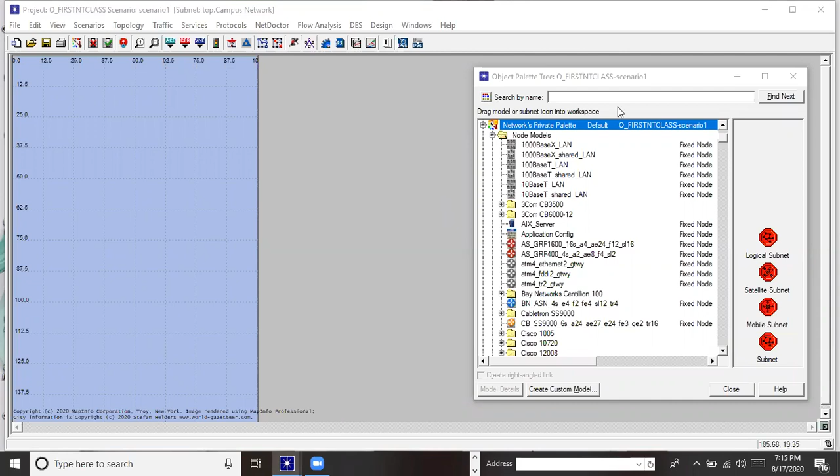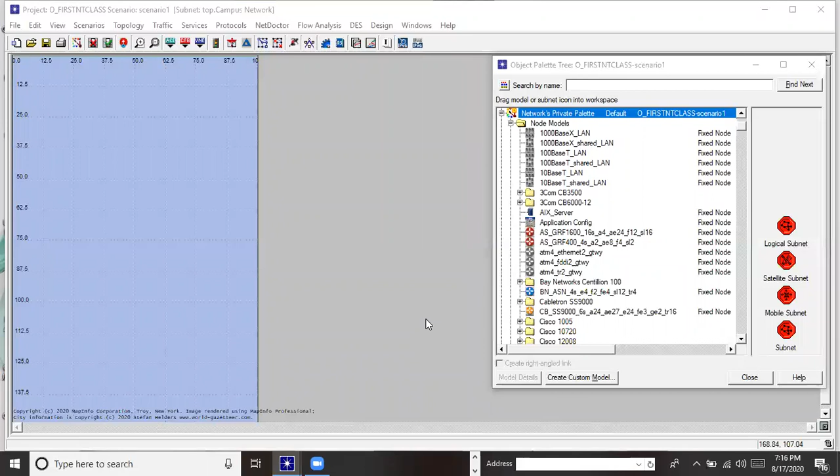Sometimes the speed also matters, there are a lot of things to consider, including the speed. But again, to avoid the looping, you have to make OPNET run as an admin. You have to configure it like that, not like the way I was just clicking, then going to the admin. You permanently do it like that, and that looping will go.

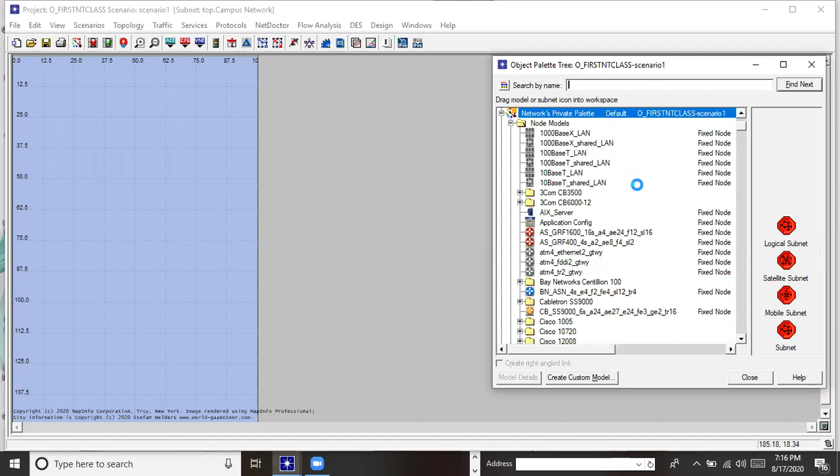All right, okay, so we continue. We have this palette now. What I like doing is where you see search by name, just before that there are those dots. Just click there, I want to expand these technologies so that we can see LANs, switches, routers, firewalls, devices, printers. So we are going to be using these tools to design a network.

Where did you click on find next? Have you seen where it says search by name? Oh okay, I found it. Yes, okay, just click there.

Right, so now we'll start designing a network. We are going to design together a network. We are going to design a cyber university campus. Are we together?

Okay, so you get a subnet. I'm going to get a subnet. We have 3 subnets: subnet mobile, and subnet satellite. We'll just get a subnet.

So how do you get the subnet? You just click on the subnet and drag it to the left-hand side. That's the work area, that's where we'll be designing our network from. You just drop it anywhere. As you can see, I've dropped it.

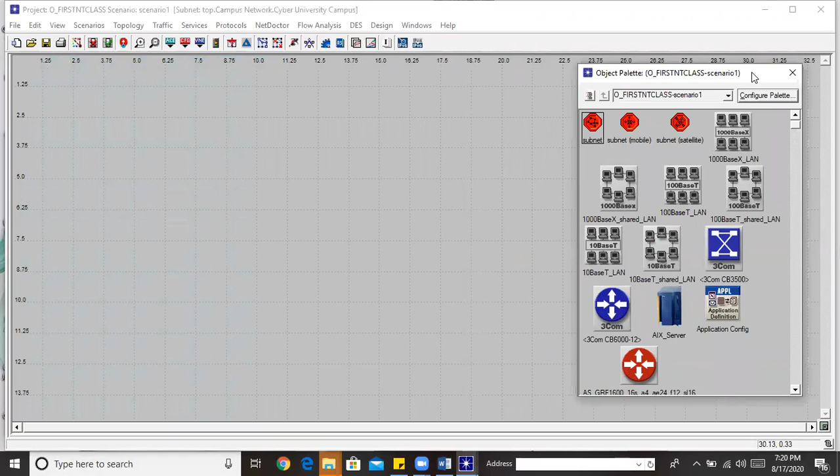So there now we'll start designing. We'll start designing. So I'm going to choose 3 departments. We are going to have administration.

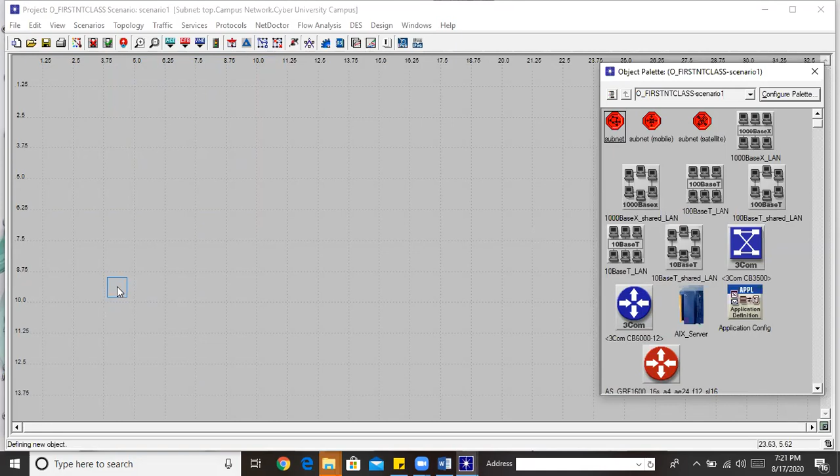We are going to have ICT support, or IT support. Then we are going to have, okay, we will put schools. Let's have School of Medicine. Or let's just put one school. We'll do it like this: I'll put this subnet, another subnet, and another subnet.

So the first one, let me say School of Computing. School of Computing. Then we are going to have admin, we're going to have admin. And we are going to have admin. Then we are going to have IT.

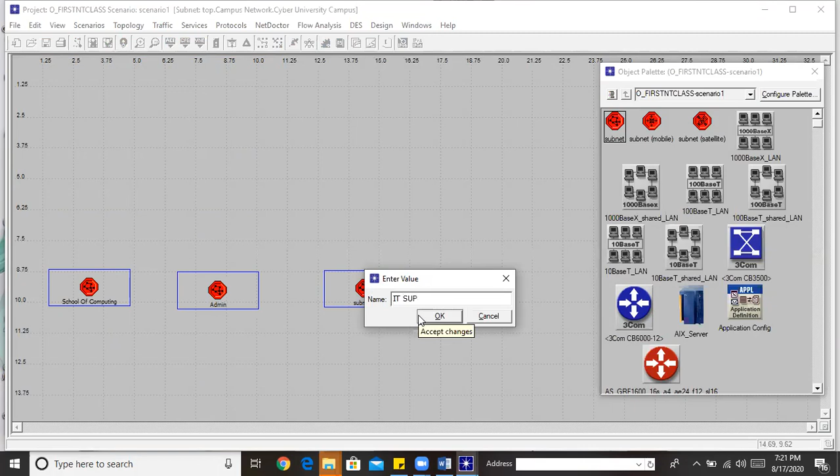IT support, we're going to have IT support like that. We're going to have IT support. Then we'll start now. We'll enter into the School of Computing department.

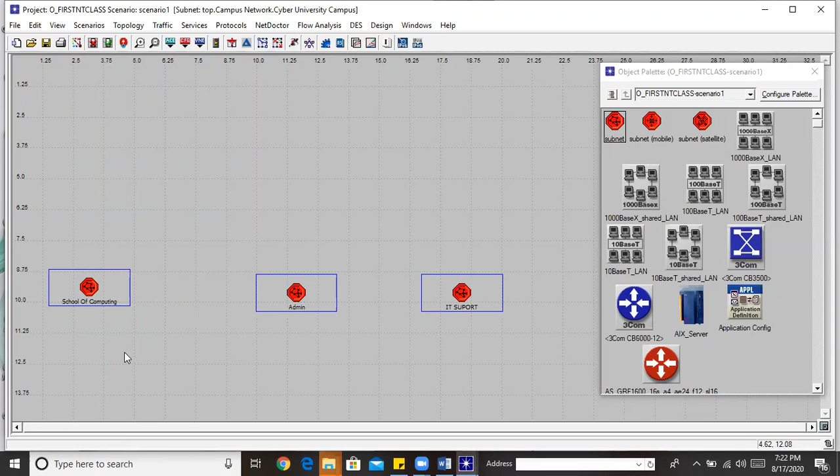Just double click there. Then I'm going to look for, when you are designing a network, what do you need? What devices do you need? A router, okay, so let's look for a router.

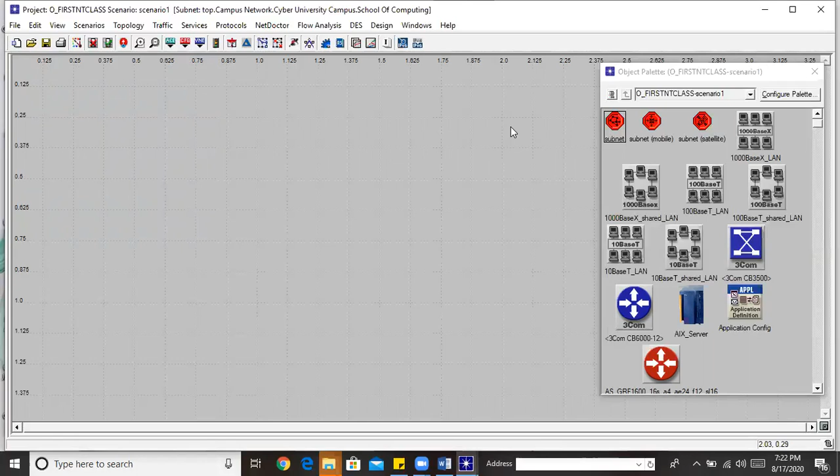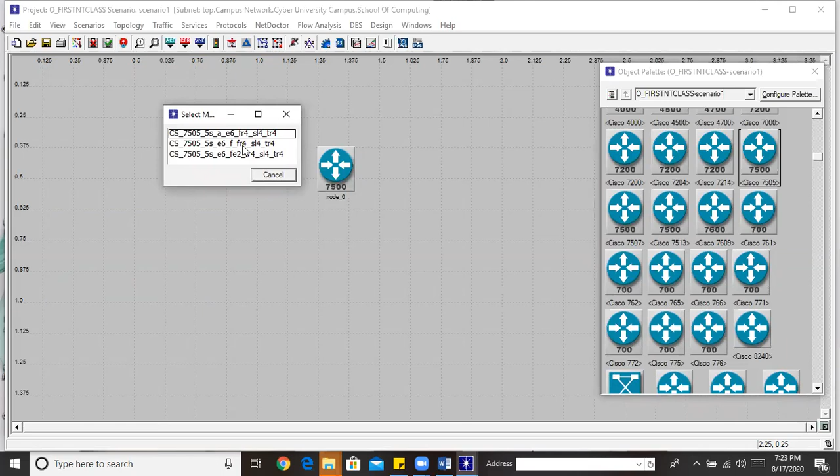Let's look for a router. I'm familiar with, I like using, let me check. 7500, I'm familiar with this one. So I'll pick a 7500 router. Then I'll get the version, the first version.

Okay, then what else do we need? What else do we need? We need the fly leads. Sorry, network cables. Okay, before network cable, yeah, we need network cables. What else?

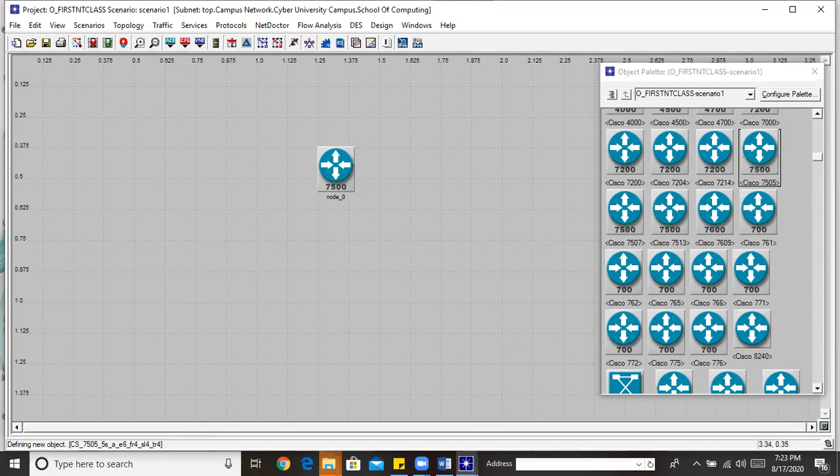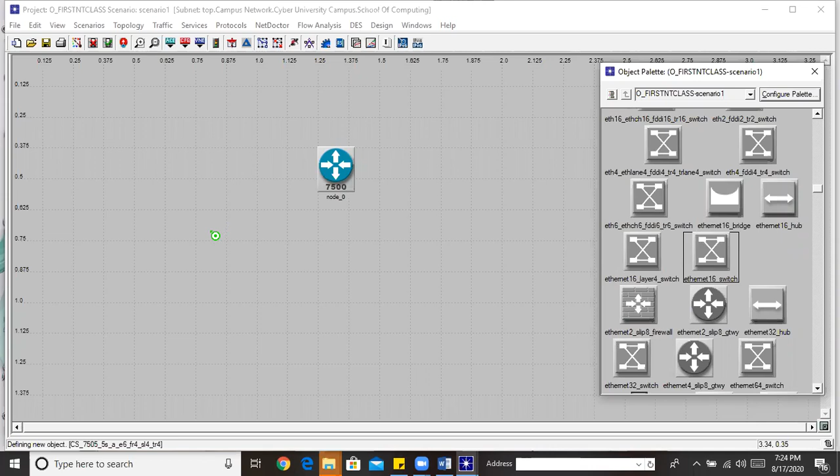What else? A switch. You need a switch. Depending on the number of users you need, that will determine the port number of the switch. Let's look for an 8 port switch. Actually, 8 port or 16 port switch? I'll get a 16 port switch.

Then I'll get the stations. Just get what we call now, we are getting 100 base T LAN. Instead of putting computers, I'll show you the advantage of a switched LAN.

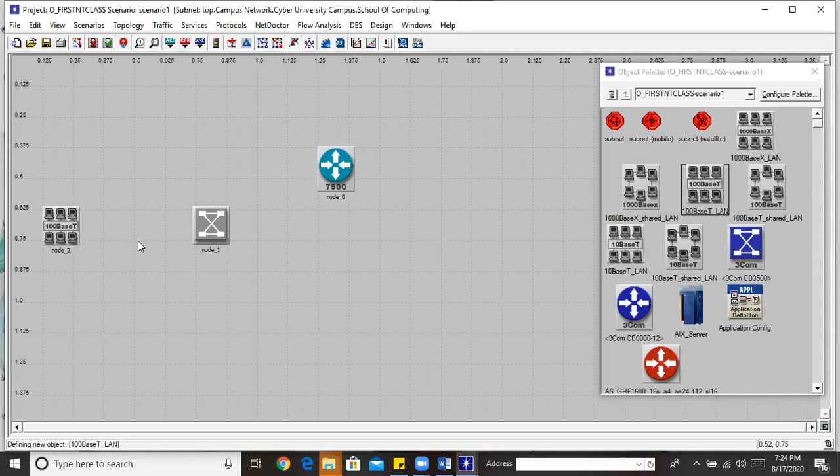That's a switched LAN. The way you see computers like that, meaning there's a switch in between. Then we should also add a printer, add the services, we should add a printer.

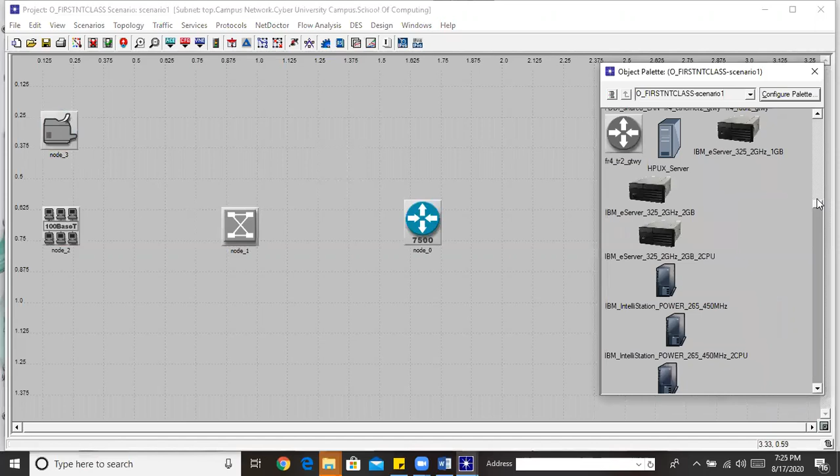All right, so we have to rename these devices. Before that, you talked about network cables. Where do you find network cables? Those are the cables. Since we have a 100 base T switched LAN, we should have 100 base T cable. Look at this, 100 base T. So I've picked a cable. You just click on the cable, meaning you have picked it.

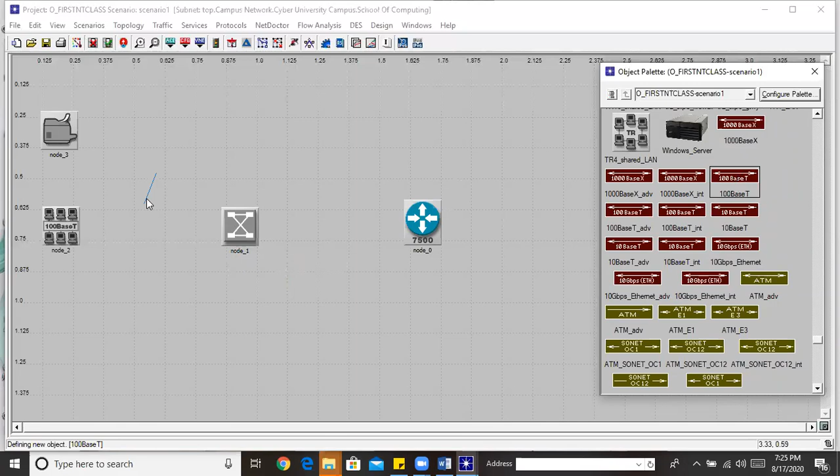Then let's start connecting. I'll connect a switch to the router. Okay, a switch to the router. I'll connect 100 base T LAN to the switch. Then I'll connect a printer to the computers, to the users. These are the users, okay?

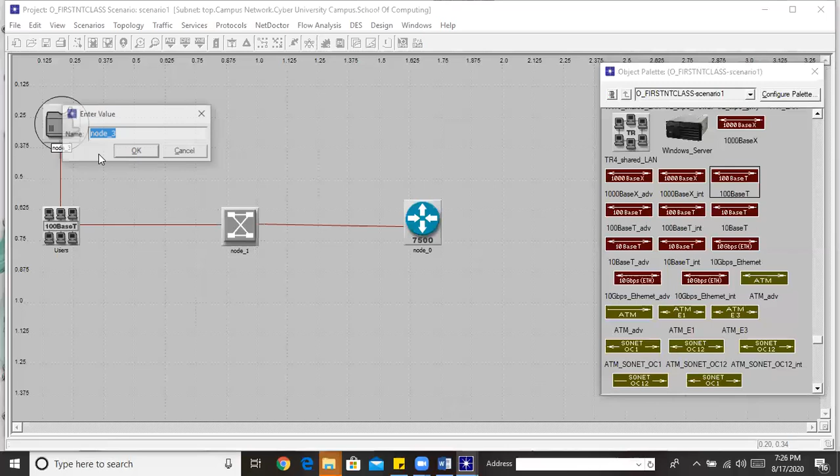So let's rename these. I'm going to set the name, then I say users. Then rename this as a printer. Then this is a School of Computing switch. Just say School of Computing switch.

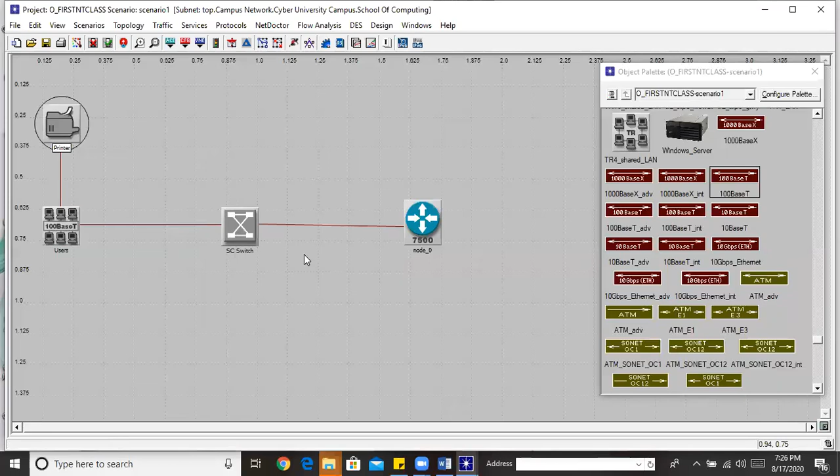Sorry, Mr. Brian. Yes. Is it supposed to be a network printer? It's up to you, you can put it as a network printer or a local printer. But since we only have those users, we don't have other users. Let's say if in School of Computing we have... let me do this, let me do this.

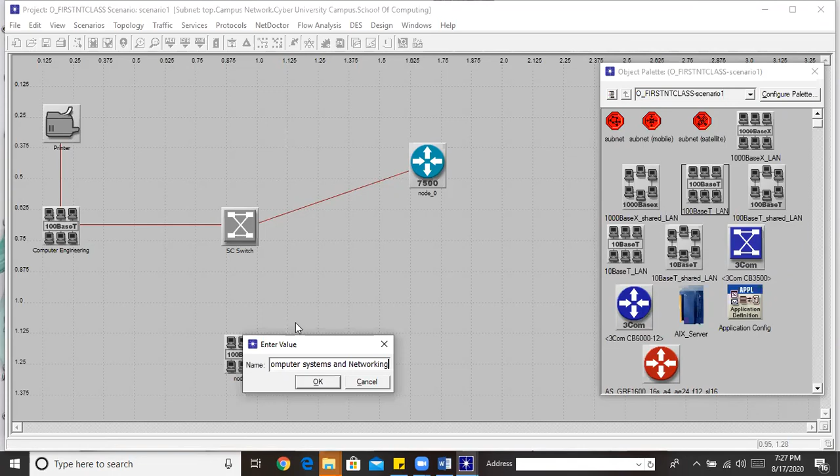We can have another bunch of users on this side, right? So this time, let me say these are studying computer engineering, then these ones are studying computer systems and networking, right? So now we can argue and say we should have a network printer.

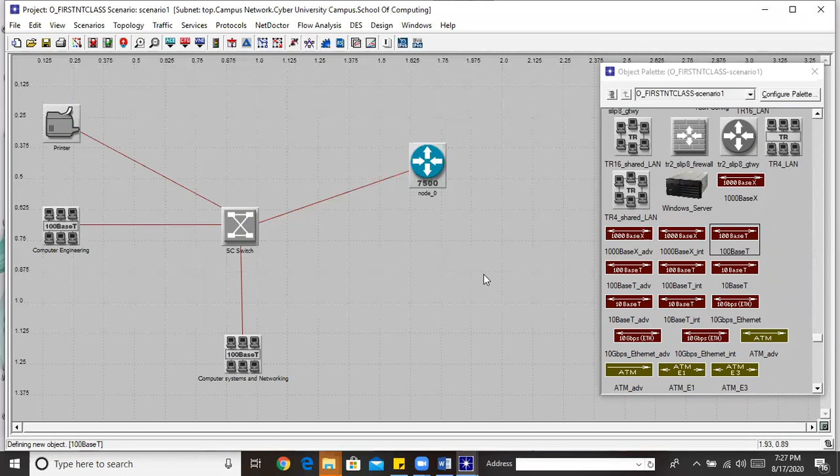A network printer where you connect one to the switch and the other to the switch. Are we clear? Are we clear? Okay, yes, wait together, okay.

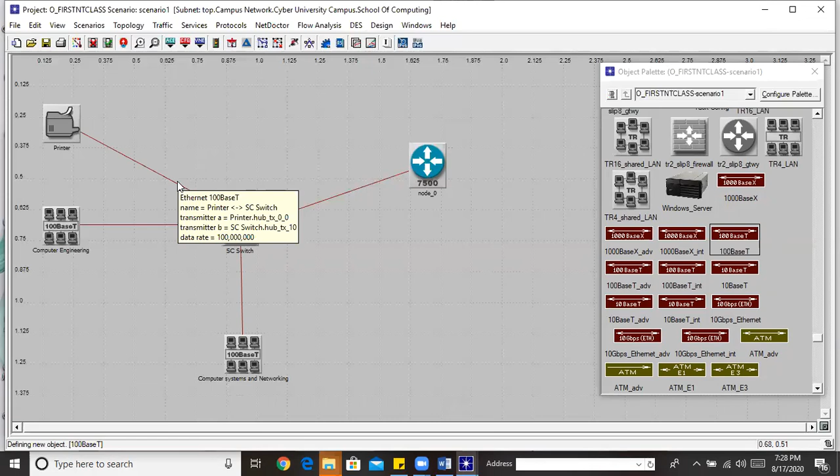This is just an example we are doing, but we have to know all the ideas of designing. Let's say if the network is bigger, you can say we are just going to have one network printer. But even here, you can still argue if you want. Remember, the design is yours, you are the network engineer, you want, you know the best.

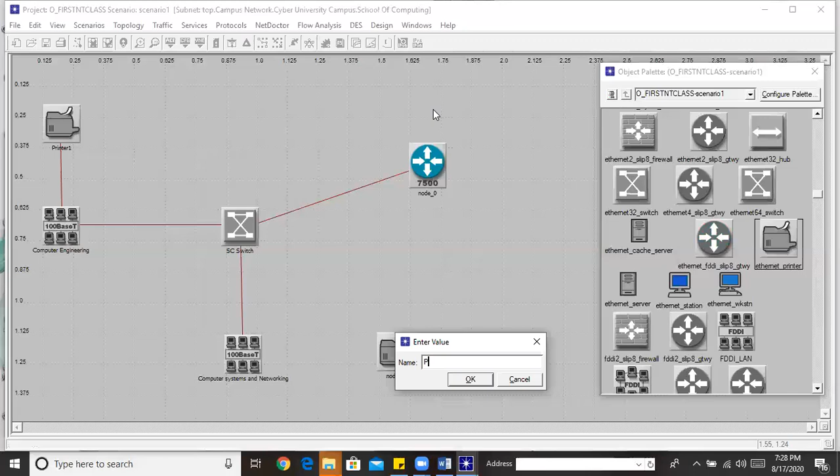So if you want, you can say okay, we have this printer, we can have this printer. Then you decide yourself, you are going to say let me have another printer. This printer will be, I can say now, printer 1. Then we are having a printer 2, connected there.

Have you seen that it is also making sense? It is, isn't it? Okay, so we have designed that network. We have designed, remember we haven't configured yet, we have just designed.

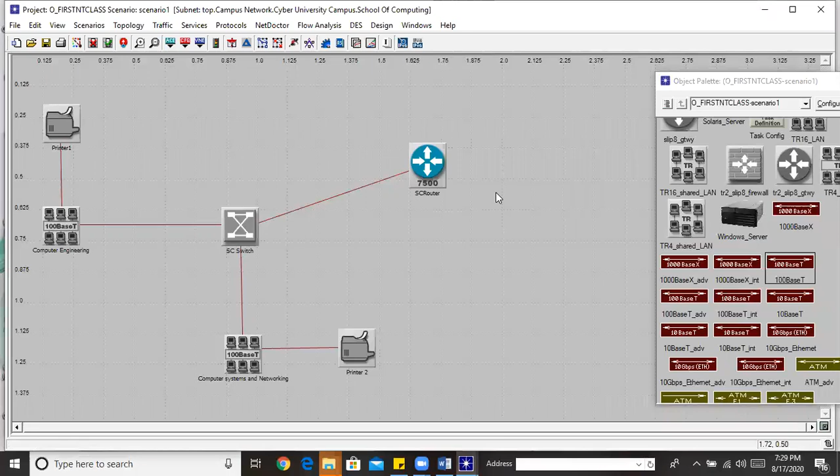So this router, you have to rename it as well. You have to rename it as School of Computing router, it's a router in the School of Computing. There will be so many routers, so it's important that you rename those routers, you give them names.

So how do you get out of this subnet? You can right click. Before we move away from this screen, how did you arrive at this switch? How did I arrive at the switch? Where I got the switch from? What has made you choose this particular one?

Let's say what makes you go for a particular switch. First of all, it's the number of users that you have. Let's say if I've got 10 users, I'll go for a 16-port switch, that is the one closest to it. So I'm going to have 10 users connected to the switch, and I'm going to have 5 more ports remaining, for future use, because tomorrow I can decide to have another computer connected to the switch, isn't it? Yes. So that switch you see, we picked a 16-port switch.

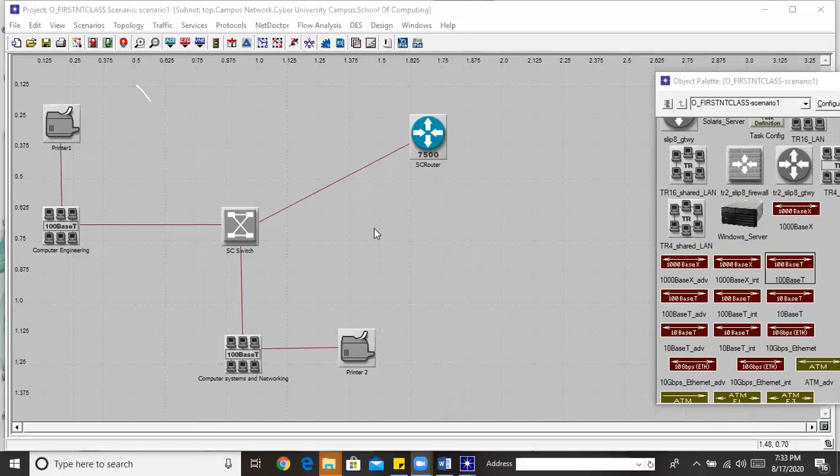You just click on 'go to parent subnet' and we are back outside that particular subnet. If you want to go back, double click School of Computing again. Look at the icons above, do you see the cursor? Where the cursor is, when you click there, it will take you to the parent subnet.

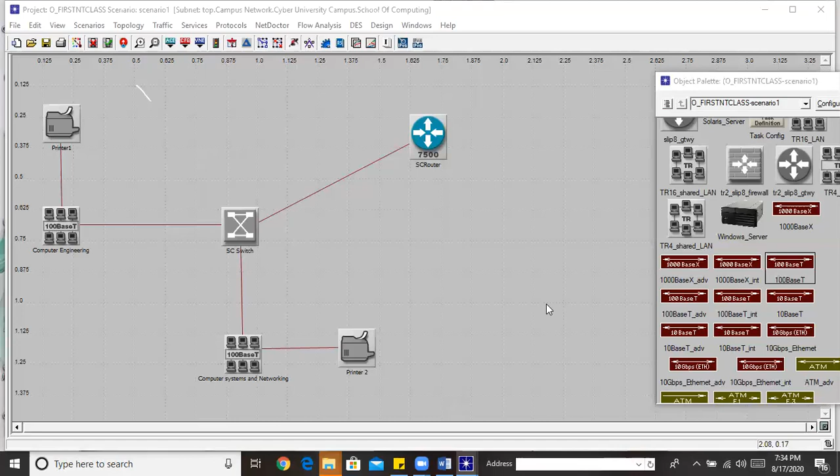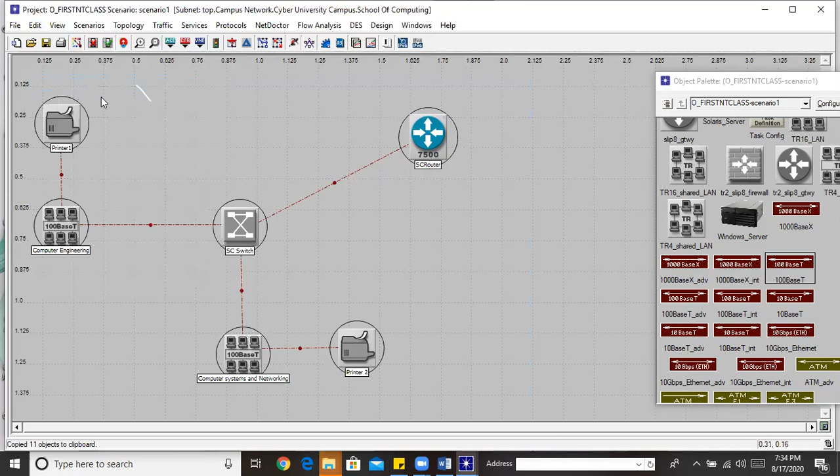To avoid the hassle of having to design it again, just copy what we have designed, copy all the components, then go to edit. Select them, go to edit, copy, then go to the parent subnet, go to admin, edit, paste. Then this topology we have again. Are we together?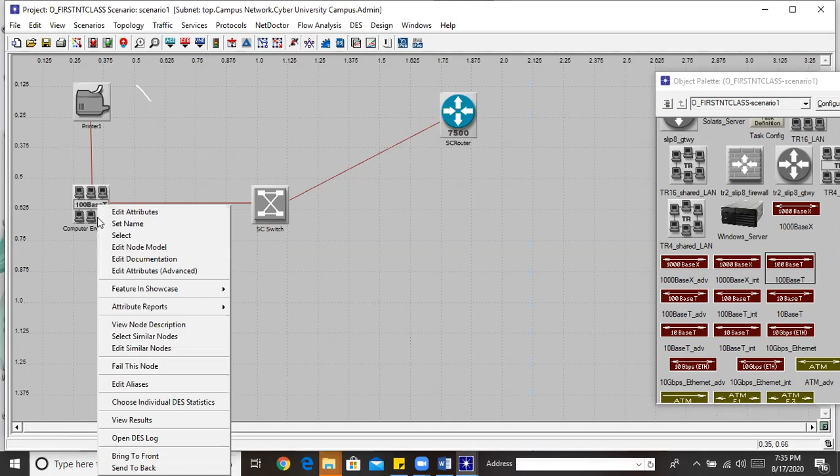Yes, so we are in admin now. In admin, we don't need this also. We're just going to have admin users, that's it.

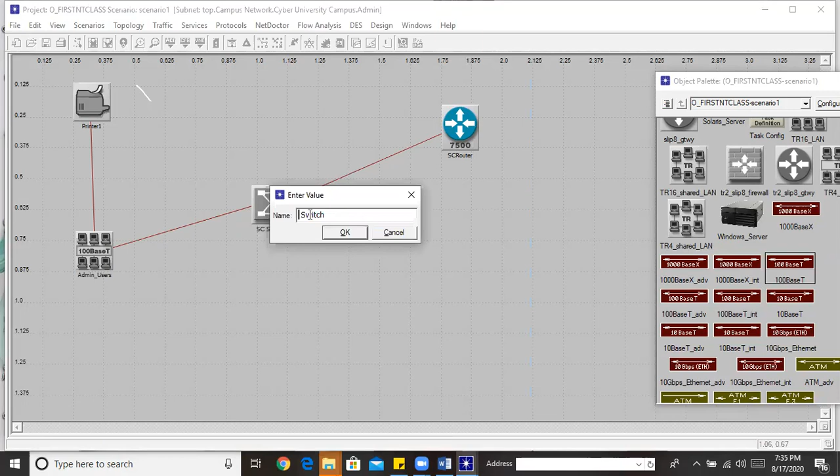Then you have to rename this switch. It's now admin switch.

Wait a minute, I think I remained behind. I remained behind, how did you delete the other? Oh, you just click on it, then hit the delete button on the keyboard.

I'm okay, yes. Have you managed to delete? Yes. Okay, right, then that's done.

Go to subnet, then do the same in the School of Computing again. So in School of Computing, we have users, those doing information systems, and those doing networking.

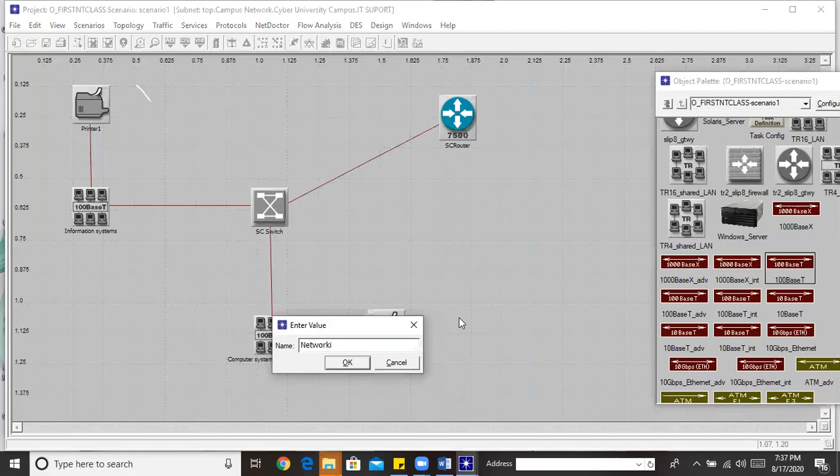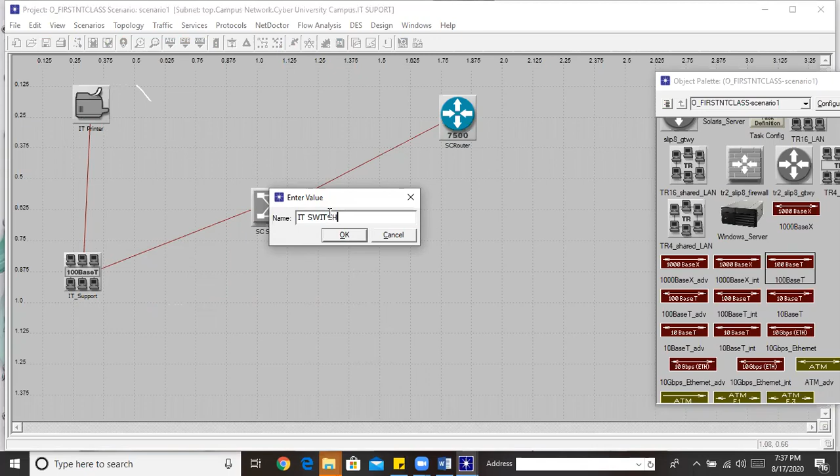Oh, this is IT support, by the way, so we don't need this also. We just need IT support. I'll leave it as IT printer. Then this is the IT switch, IT router. Okay, IT router.

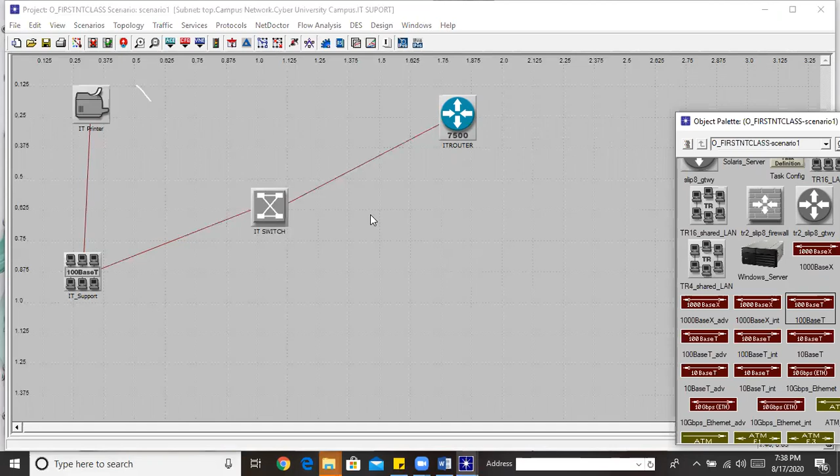Are we together? Yes. So I'll go to the outside of this subnet.

Just a quick question: apart from the simulator, are we also going to get to use actual routers? I'm sure by next semester we'll be using also packet tracer. Okay, okay.

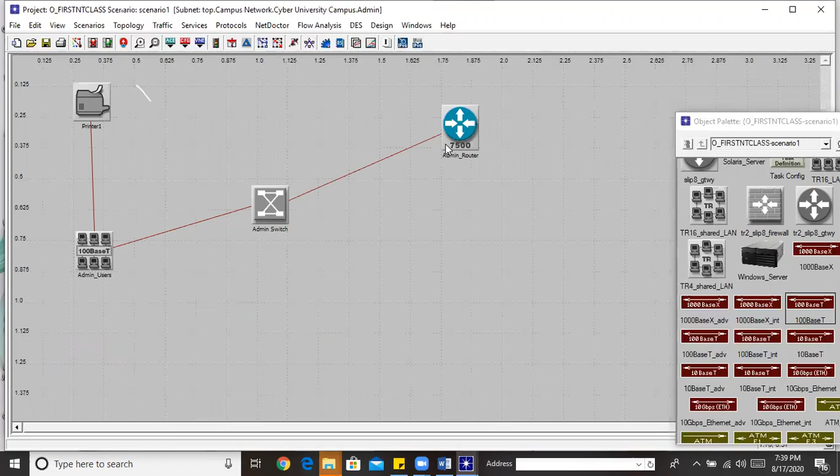Then okay, so now design the network, design this. I'm sleeping. Okay, go and sleep.

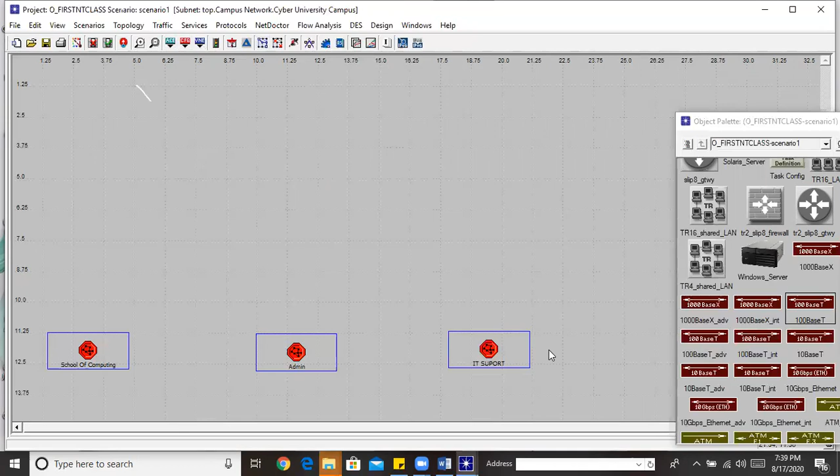So now we need to link these routers, isn't it? I mean, we need to link these subnets because they fall under Cyber University Campus, so these subnets need to be connected together. Isn't it? Yes, okay.

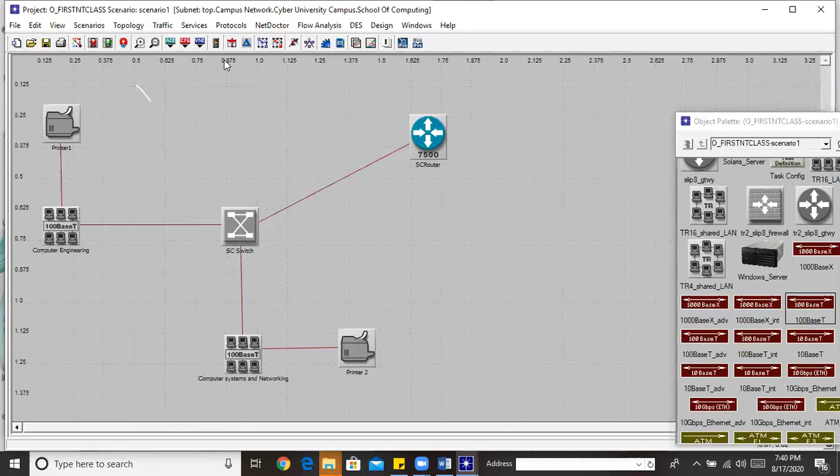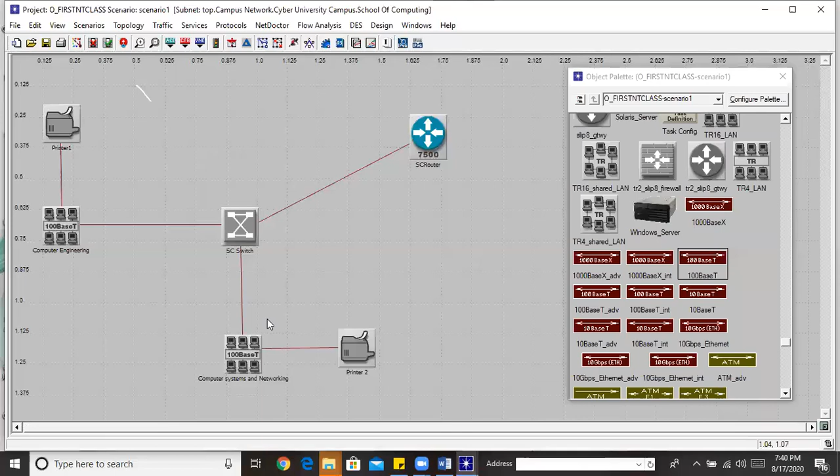So we need a backbone link, a faster link than what's inside the local area network, because in the LAN we have Cat6e, and we can't use Cat6e as a backbone, isn't it? Yes. So we'll put a switch, a core switch. I'm sure you've heard of a core switch, or if you haven't, you are going to hear about one. We are going to put a core switch.

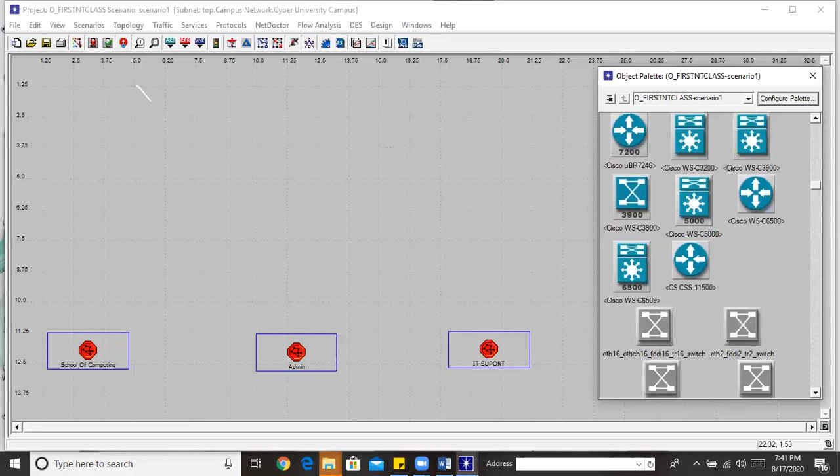I'll still look for a 16-port switch. I'm renaming this.

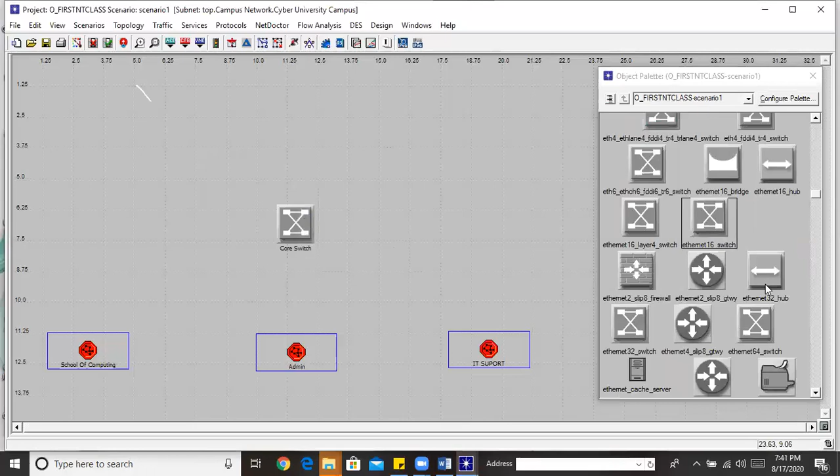This is a core switch. We're still using 100 BaseT here. It will connect there, and it will pop up the node where this switch will connect.

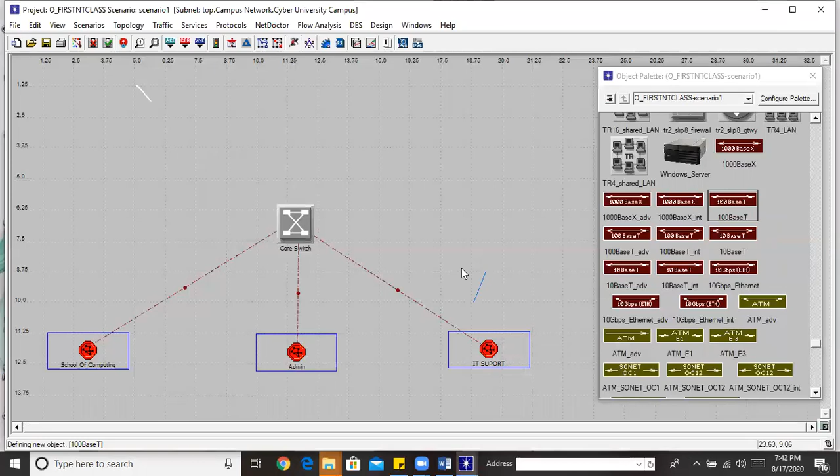This switch is connecting to a router. Click OK. Even this one is connected to a router. Then this one will also connect to a router.

What cable are you using to connect them? 100 BaseT, I'm using 100 BaseT. When you click there, it's Ethernet 100 BaseT. So is BaseT like a Cat6? Yes, Cat6.

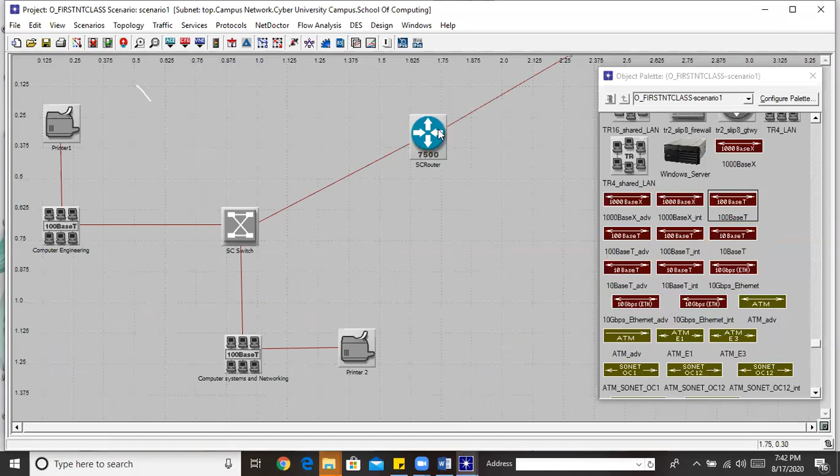When you go to School of Computing, you can see the router. It's on the grid now. Are you seeing it there? Even this one is connected.

So we'll need to log in to enable the ports and everything into the switch? No, that one is already done automatically. Let's see if we can go and do it manually. But there's the automatic one and the manual one.

Okay, so now remember we had this. This is now the main subnet. When you enter there, that's where we have this.

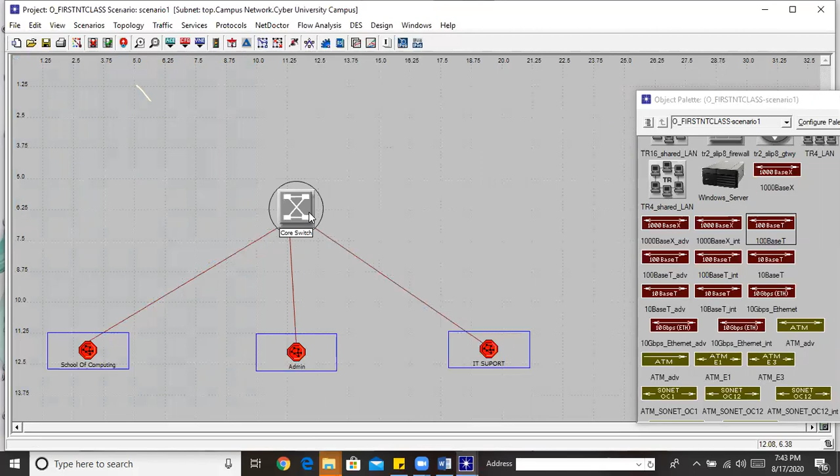So here now we are going to put again a core router, because this switch can't generate traffic. So let's look for a router.

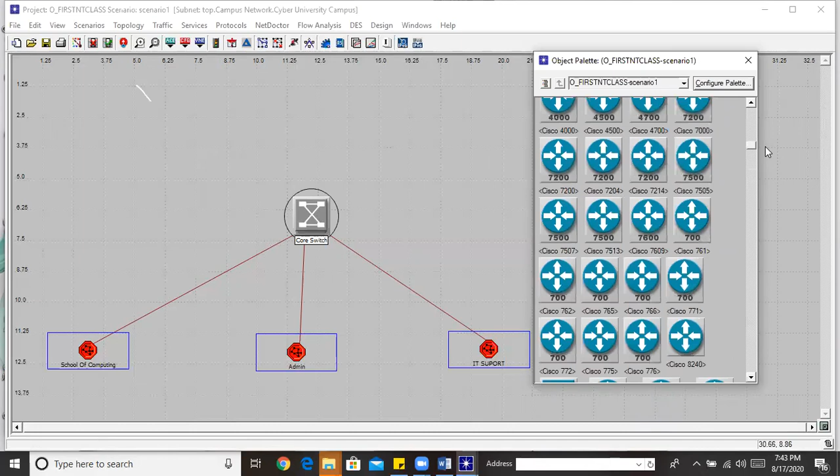The same router that we used, the 6500. I mean 7500, this one. Then we use the first version.

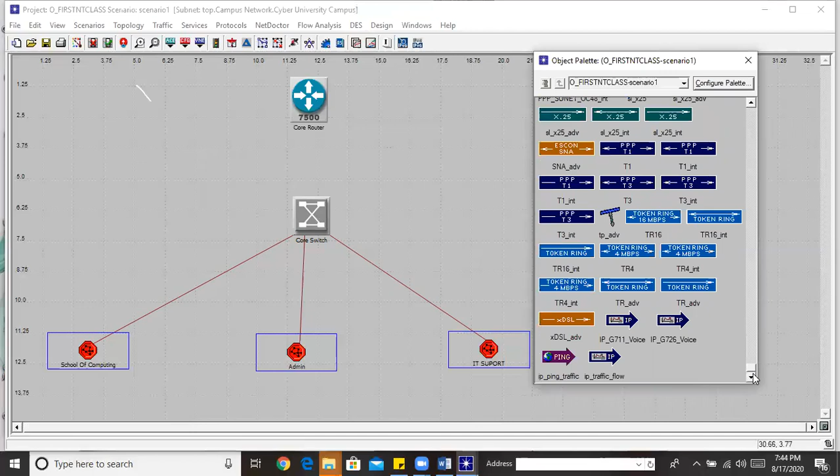So let's name this as core router. Then we are using, let's still use Cat6, 100 BaseT, and connect it there.

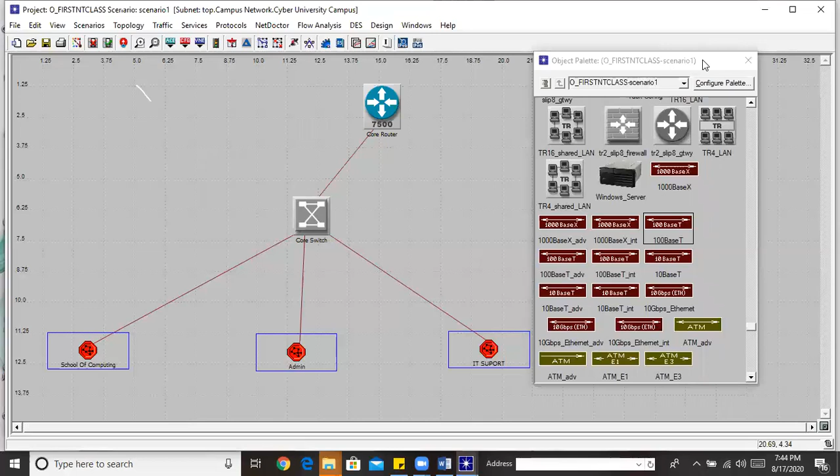So we've connected this router.

I'm going to look for the cloud, the internet itself, which is shown as a cloud, the ISP. Again it will time out, we have to relog in again. So we are looking for, I'm looking for the cloud, don't know if it's there.

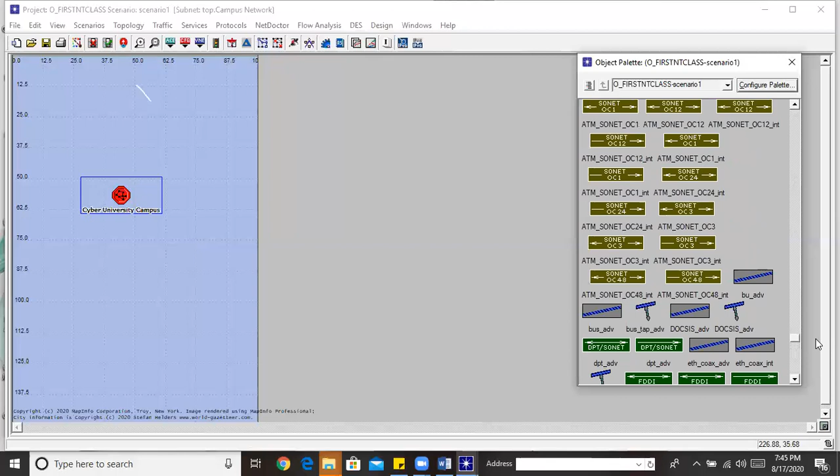Cloud, okay, IP32. So that one you name as internet. Then we are connecting using a faster link, I'm going to use PPP T1.

You connect to a core router, as you can see, we just have.

Sorry, which subnet are we connecting the cloud to? A core router, the one I've put. It's not part of, it's outside those 3 subnets.

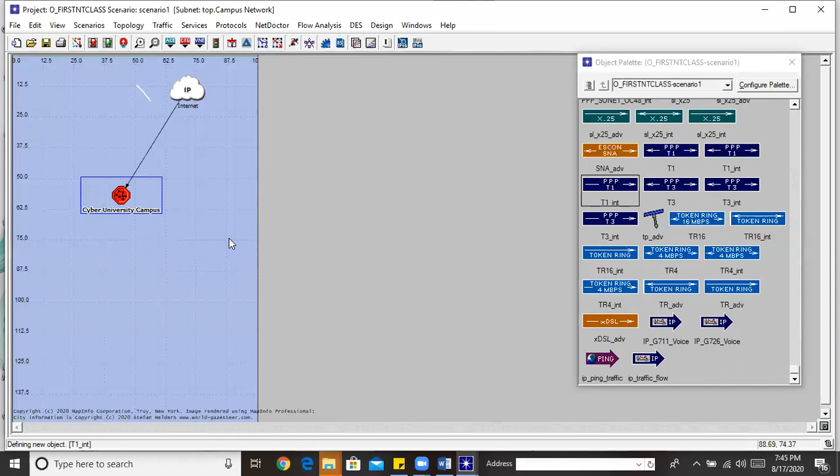So it's the whole campus itself. Yes, as you can see, it's connected there. The whole campus now is connected to the cloud.

Are we together? So now I've designed the network. We haven't configured it, we have designed it, but now this is where we have to test to see.

I'm coming. We are going to test to see if these links are working, the way we can test a cable, if a cable has got a fault or not.

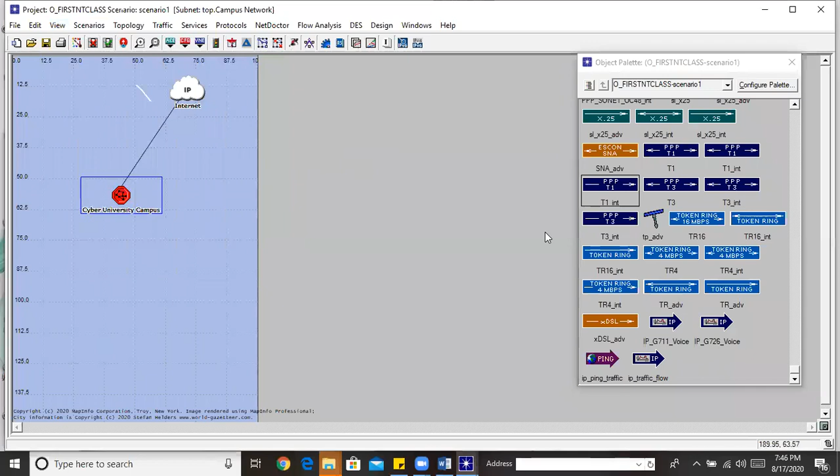So you go to scenario, you go to view. Sorry, for the cloud, are we still using 100 BaseT? No, use the PPP T1, I've used PPP T1.

Let me show you, I've used this PPP. I've clicked PPP, that one. PPP T1.

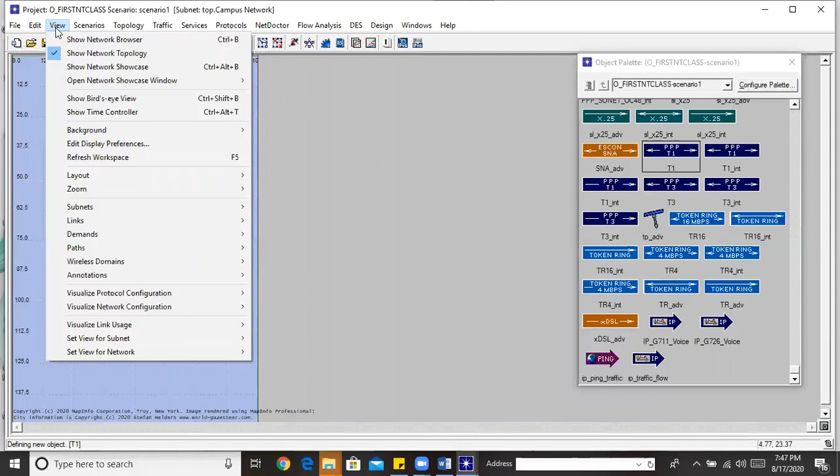Okay, yes. So you can go to view, no, go to topology, then view, then verify links. You click on verify links, then click OK.

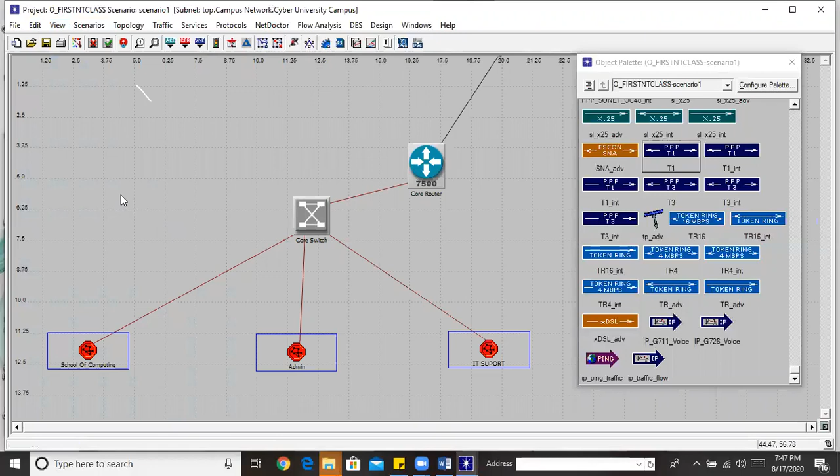So the links are okay. The links are okay.

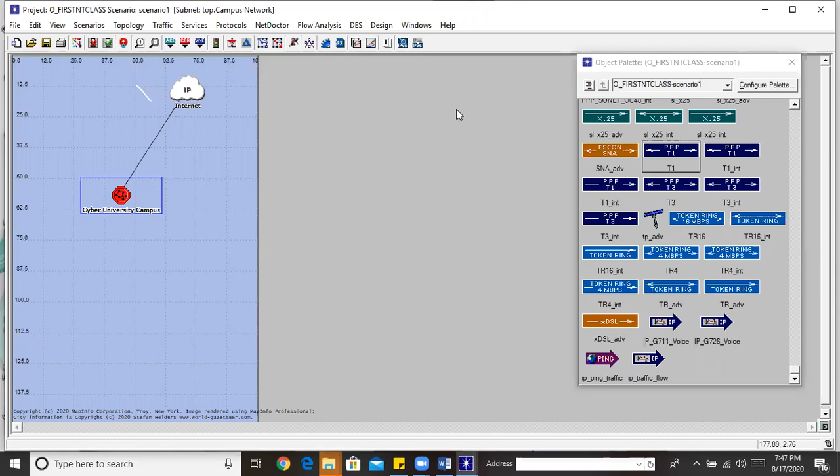The subnet from IT support to the core switch is showing an X. Yes, from IT support it's showing an X, to the core switch. For me it's not showing X, everything is okay, so I don't know.

You made a mistake somewhere, you need to go through this video. I'm going to upload it on YouTube, then I'll send you the link so you see exactly. Because today we are just designing a network, we have just designed a network. We haven't configured yet, so the next session on Thursday we are going to configure a network.